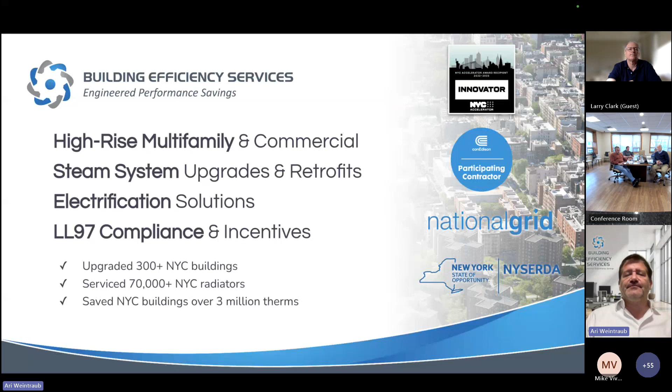Joining us today is Approved Oil. They've been in business now for close to 100 years, over 90 years. We work with the Approved Oil team, really phenomenal guys, very knowledgeable about everything oil, the delivery, the infrastructure, maintenance. We work with Jeff in particular, superstar at Approved Oil, and really great guys to reach out to.

And over at New York City Accelerator, we have Marissa Morris. We've been doing a number of presentations with Marissa, a really phenomenal account manager, an excellent resource for anything Local Law 97. We'll have the contact information at the end.

So let's get into oil heating. I'm going to call up the guys from Approved Oil, and please take it away. Good afternoon, everybody. I'm John Sutherland, head of sales for Approved Oil. I'm joined with Jeff Cohen, who you just gave some nice compliments about. Jeff is the head of the mechanical division, so all things boilers, burners, service, and installation. Jeff will talk today as part of the presentation.

Before I get started, just a quick thing about Approved. As you mentioned, we are probably one of the largest fuel oil distributors and energy providers in the tri-state area. We've been around since 1932. We're going into our 92nd year in business. So tremendous staying power. Again, what we offer: fuel oil, biofuel, diesel, natural gas, electricity.

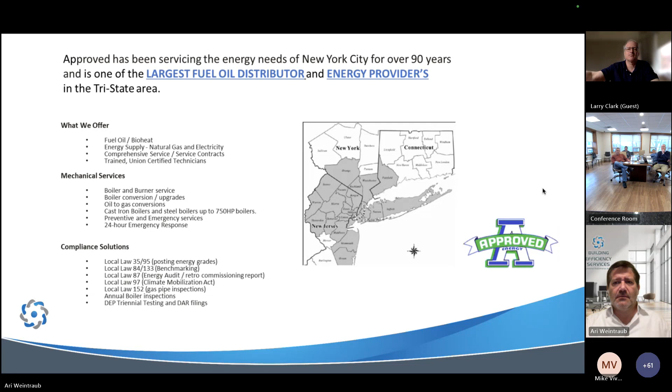So those buildings that are on number 4 oil, it's very important to understand some key dates. It's being banned. You can no longer use 4 oil after July 1st of 2027. Now, even that's 3 years out, but there's a couple of things that are happening. All these buildings that have boilers need to file for a triennial permit, which is a certificate of operation of your boiler and permitting.

If you're a 4 oil building and that triennial permit comes up after June 30th, you will not be issued that permit. That means you have to do something to get off of 4 oil prior to that. If your permit comes due, let's say June 25th, technically you can renew it, and you'd be good through July 1st of 2027. But after July 1st of 2027, you have to be off it.

But even still, if you're a 4 oil building and you start to file for your Local Law 97 related activity, if for some reason you're above the emission guidelines, you're going to have to do something potentially sooner than 2027. So these are the things that you have to be concerned about. Now, June 2024 is for permitting purposes. If you're not in a New York City owned building, you're okay until 2027. If you're a New York City owned building, you cannot burn 4 oil beyond July 1st of 2025.

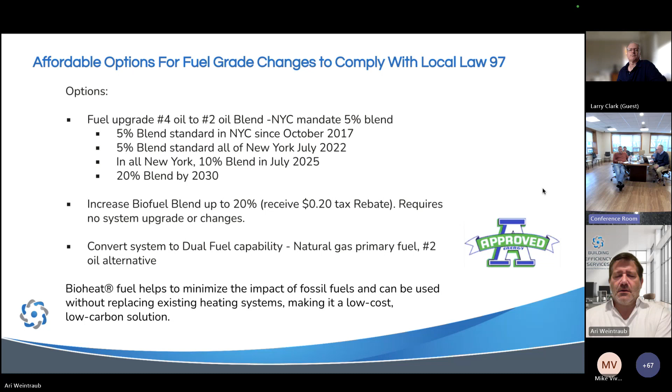The other thing you can do is convert your system to a dual fuel system where natural gas is your primary fuel. And we do hundreds of those a year. So basically you're left with 3 options. You can go from number 4 oil to biofuel, number 2 oil to biofuel, or do a fuel grade change and go to dual fuel and burn natural gas. If you want to change the slide, that would be fine.

So biofuel comes from renewable products. Most of the products you see today are either soy or plant-based products from the Midwest. They're rail car shipped to our terminal in the Bronx, where they're heat blended, put into our 25 million gallons of storage, and sold. As a wholesaler, we sell to other fuel oil dealers, and we sell to our own retail customers as well.

As far as the efficiency of it, it's a little less efficient than your typical fossil fuel products, but the cost is the same and it's cleaner. So it acts as an emulsifier, and what it does is it actually cleans a lot of the debris and sludge that's in the bottom of your tank, and it pushes it through your system. So you end up with a cleaner fuel oil tank structure.

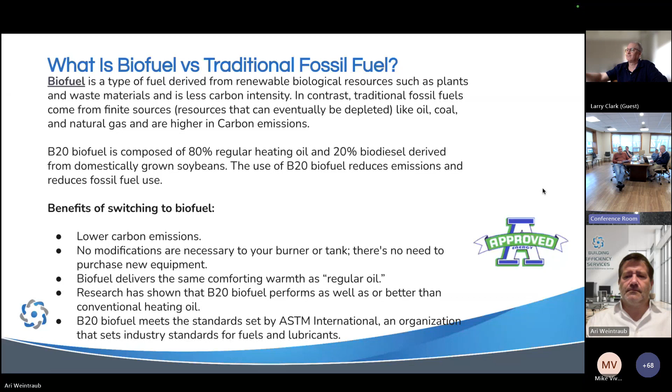So the benefits of switching to biofuel: it has a lower carbon emission. There's really no modifications to your burner or to your oil tank. There's no need to purchase any new equipment in that case. You get the same comfort as regular heating oil, and it performs better in most cases than conventional heating oil because it's got less impurities in the system. And it meets all of the engineering and ASTM standards that are operating within the state and the United States right now. So that's basically the situation there. If you want to change the slide, Ari, I'll go to the next one.

So people often ask, well, I got to change from number 4 oil to number 2 oil. What are the costs involved in that? So basically, the cost could be anywhere from $10,000 to $18,000. And the reason for the difference is what actually has to happen to the tank. And I'll discuss that in a couple minutes on the next slide. There'll be a carbon emission improvement of right now between 14 and up to 18% in terms of your carbon emissions reduction. So that will help your Local Law 97 score.

Also, my concern is as fewer properties begin to burn number 4 oil, we're going to start seeing an increase in the cost, the same way that happened to number 6 oil, which became a boutique blend when a lot of the buildings changed to number 4 and number 2. And as I said earlier, there's no difference in the cost between using a B6 blend and a B20 blend for biofuel. The only difference is the tax rebate. Obviously, with B6, there's a 6-cent per gallon tax credit. With the B20, there's a 20-cent per gallon tax credit that's in place.

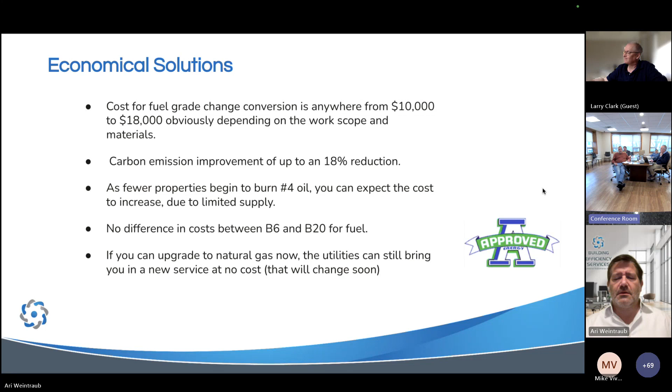And you can still upgrade to natural gas. The utilities can still bring you in a new service at no cost, but rumor has it that that's going to be changing soon. So let's change the slide and we will go through what's needed for a fuel grade change. So the first thing we do is we file with the Department of Buildings for the actual fuel grade change. And we can self-certify the results.

We also need to file an amendment with the Department of Air Resources as well as New York State for the materials that are inside of your oil tank. We inspect the oil tank to make sure you're properly contained. Either the tank is going to be vaulted, which means it's wrapped in concrete, or it's in an oil tank room. And if it's an oil tank room, you're going to have to epoxy paint or line the protective walls of the tank just to make sure that oil doesn't leak out.

They're going to pump out all the product from the tank. They'll squeegee clean out the remaining fuel that's in the bottom of the tank. They'll reseal the manhole cover. When they're done with that, they'll perform a tightness test to make sure the tank is not leaking. They'll install a decal to show your fuel is now burning number 2 oil.

You'll get the written results of the test within 24 hours. You'll know if you passed or not. And we'll perform the necessary burner work, which is nothing more than plating off the preheater, probably doing some adjustments to the burner, cleaning the nozzle, and then we sign off the project.

But if anyone's interested in getting this done, it's going to be a very busy summer for that. We have a lot of people already signed up to do fuel grade changes to number 2 and eventually to go to gas. You can change the slide, Ari.

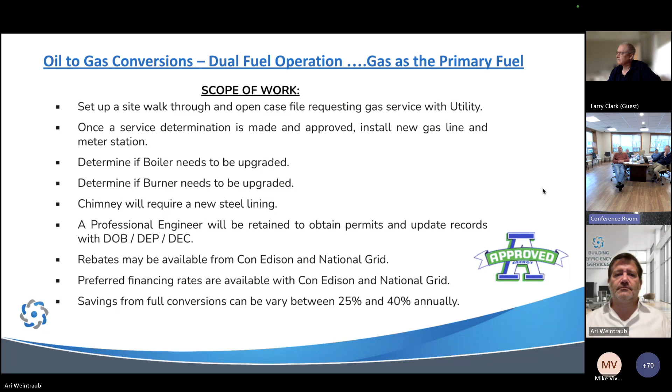So basically you're paying for this conversion through savings. And the savings annually, if you do the full conversion, could be anywhere from 25 to 40%. And that's it. So now, John, I'll turn it back to you as far as biodiesel and how it can help and where the emissions fall out on these.

Sure. Just to recap what Jeff said, certainly #6 oil is going away and customers have to do something about that, right? They can easily do a fuel grade change by going to 2 oil and then purchase a blend of either a B10 or a B20 at roughly the same price that they're buying today, but you would get that tax rebate on the back end. So you can get up to a 20-cent tax rebate if you go to a B20, and it'll certainly help that building meet whatever Local Law 97 mandates or guidelines are posted for the year 2030.

Or you can go the more expensive route right now, which would be a dual fuel opportunity where gas is the primary fuel and oil is the backup. But I just want to say one thing: you can do that, but if you're on 2 oil today and you go to a B20 blend, that B20 blend is 14.6% less carbon intensity than natural gas.

All right. So you might not have to do a complete capital project, which could cost you $350,000, $400,000 to put in new boilers, burners, and everything, bring the gas main in and so forth. You might be able to just get away with going to a B20 blend, less costly in terms of the capital cost, right? And just as efficient as anything else, but really no equipment upgrade. So I think that is certainly what we want to stress right now.

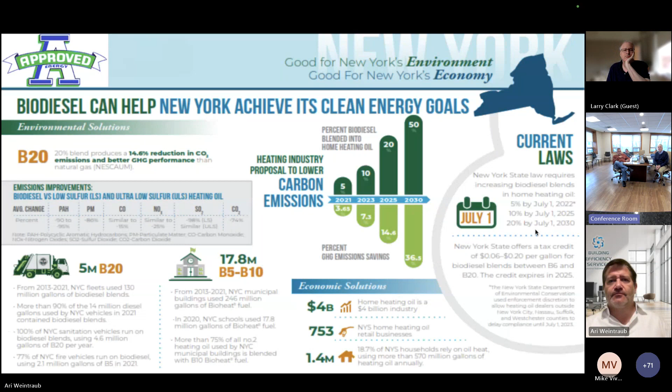Thank you very much, guys. Really great presentation. And I would also comment on something Jeff said, that it's going to be a very busy summer. The deadlines for Local Law 97 have kind of snuck up on us, and now we're in it in 2024. The work should be done by the end of the year and filing in 2025. So we're feeling that as well as contractors helping buildings with their efficiency. Better to get on it sooner than later. Reach out to Jeff and John. They'll be able to help you decide on your next steps, but better not to wait on it.

So let's go on to Local Law 97. I'm going to call on Morissa, please, from Accelerator. Really phenomenal resource for Local Law 97. Go ahead, Morissa. Yeah, thanks, Ari. Hi, everyone. My name is Morissa Morris. I'm an account manager with the New York City Accelerator program.

Just a little bit of background on our program. We're a completely free advisory service through the Mayor's Office of Climate and Environmental Justice. We work with thousands of buildings across the 5 boroughs to build a cleaner future by lowering pollution and reducing carbon emissions. Any building over 5,000 square feet can work with us, new or existing. Smaller buildings we can refer to our partner organizations and other programs available to you. How does it work? You reach out to us, get connected with a dedicated account manager like myself, and receive objective advice customized to your needs.

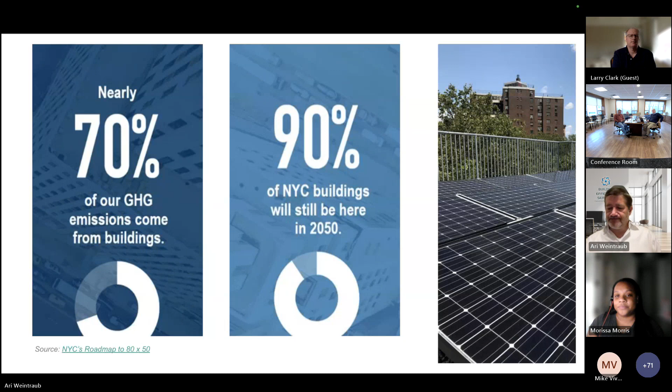So first, the Climate Mobilization Act. This was passed in 2019. It is the largest climate solution put forth by any city in the world, and it consists of many different local laws. It's a legislative package to limit emissions on buildings over 25,000 square feet. So this includes Local Law 92 and 94. These set the green roof and solar PV mandates.

Local Law 33 and 95 establish energy efficiency grades in our city. Local Law 96 establishes PACE clean energy financing, and the backbone of the Climate Mobilization Act, Local Law 97, which we'll talk about in way more depth today, sets carbon emissions intensity limits for buildings over 25,000 square feet.

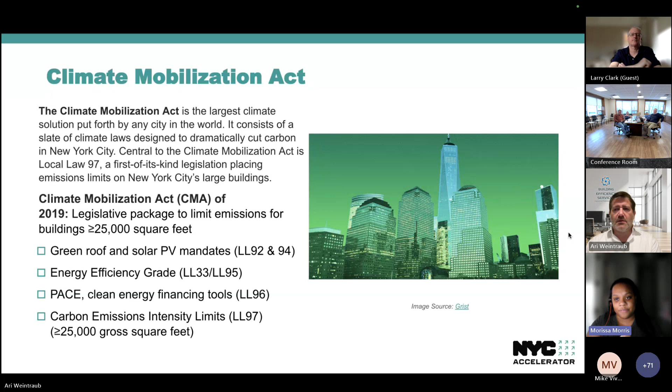So as a quick overview, as I said, Local Law 97 sets carbon emission limits for buildings over 25,000 square feet. It's broken down into two main articles. There's Article 320, which outlines emission limits for different occupancy types, starting this year in 2024, with increasingly stringent carbon caps every 5 years through 2050. Specifically, affordable housing under Article 320 has some different requirements, and I'll talk about that in a later slide.

There's also Article 321. This establishes an alternative pathway for certain types of affordable housing, providing the choice of the prescriptive pathway or meeting the 2030 limits by 2024, so by the end of this year.

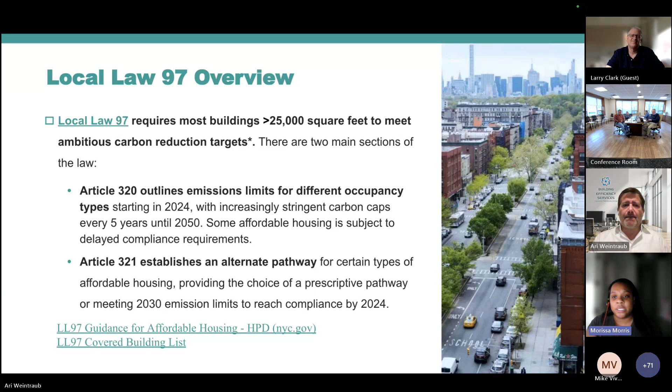Two really important links that I want to highlight, and when you receive the slideshow afterwards, you can definitely take a look. Local Law 97 guidance for affordable housing on HPD's website is a great place to start if you have no idea where to begin. And the Local Law 97 covered building list. If you're not sure if your building is subject to Local Law 97, I highly suggest this being the first place you take a look. See if your building is on this list, and if it is, then feel free to reach out to the Accelerator program, and we'll be able to give you the next steps for your building to comply with Local Law 97.

So as a quick overview of affordable housing under this law and how the different articles could apply to your building, Article 320 and 321 are broken down even further for affordable housing. Some important things to note, and I'll go through this chart in a second, but in 2022, DOB released a first rule package that provided some more clarity to owners. And then in 2023, DOB released a second package of rules, which includes Article 321 penalties and penalty mitigation opportunities for both articles, Article 320 and 321.

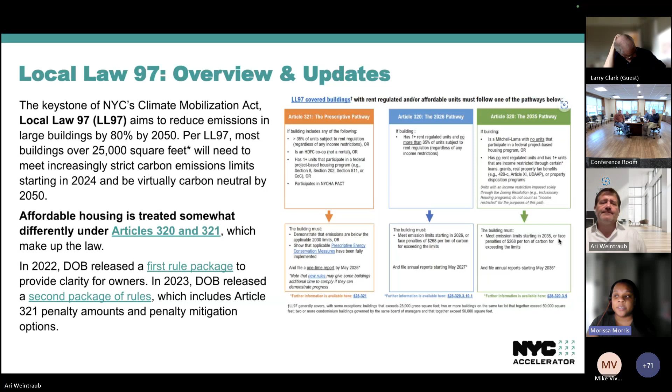So if you are interested in more information on those penalties, penalty mitigation opportunities, and how your building might be able to take advantage of those mitigation opportunities, definitely reach out and we'll be able to give you some more guidance.

So this is a breakdown of the chart on the first slide. What I want to highlight here is which buildings apply to Article 321 versus Article 320. So Article 321, the prescriptive pathway, applies to buildings with more than 35% rent regulated units, HDFC co-ops, buildings with one or more units with federal project-based funding, so that's like Section 8, 202, 811, and NYCHA PACT and RAD buildings.

Under Article 320, but subject to delayed compliance, buildings with at least one rent regulated unit, but up to 35%, would comply under Article 320, but they have a delayed compliance until 2026, so that would be their first year of compliance.

And then for Mitchell-Lama rentals and co-ops with no federal project-based funding, and for buildings that have no rent regulated units, but at least one income restricted unit, they would comply under Article 320, but they have a delayed compliance until 2035. So if you think any of your buildings fall in those two pathways, again, I can't reiterate it enough. Still reach out, even though you have a delayed compliance, you definitely need to start planning now.

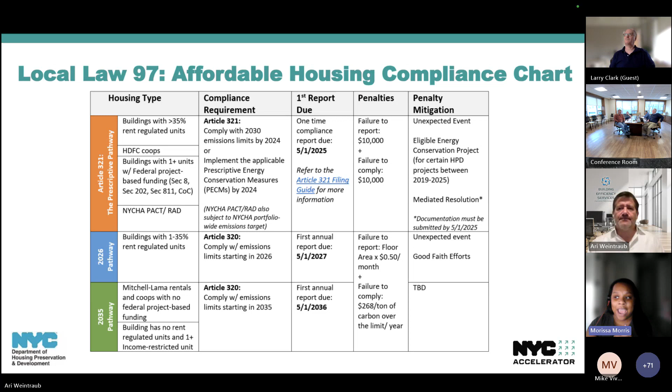So this is Article 321 in a little bit more detail, and we'll go through this row really quickly. So as I mentioned, the different housing types that fall under this are those different types of affordable housing. The compliance requirement for Article 321: you either need to comply with 2030 limits by the end of 2024, or implement all the applicable prescriptive energy conservation measures by the end of this year.

For affordable housing, this is the important distinction. This is a one-time compliance report that needs to be filed May of next year. So it is a one-time compliance. You don't have to meet those subsequent limits up to 2050. And the penalties set for affordable housing are failure to report is $10,000 and failure to comply is $10,000.

The penalty mitigation opportunities under this article are if there's an unexpected event or if you have an eligible energy conservation project, and that's for certain HPD projects. And there's a mediated resolution specifically set for Article 321. And if you need some more information, of course, I can provide that for you as well.

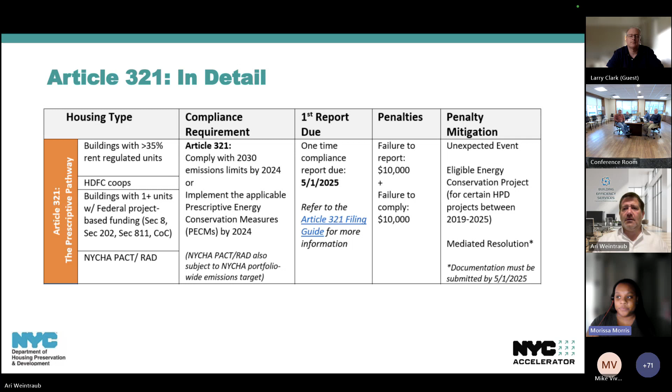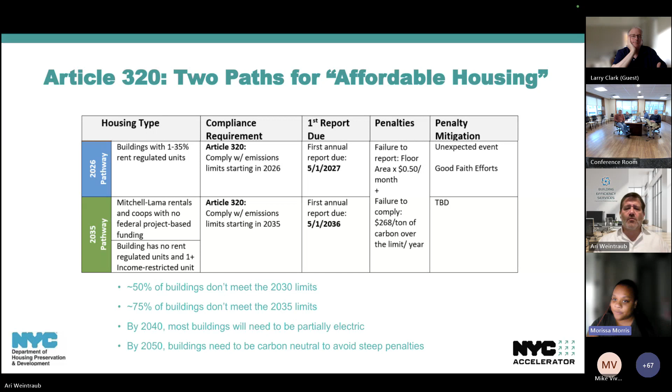Some things I want to highlight for these two groups of buildings: 50% of buildings subject to Local Law 97 don't already meet the 2030 limits, and 75% of buildings don't meet the 2035 limits. So, although you have this delayed compliance, it's super important to make sure that you already have a plan in place to figure out how you're going to get your greenhouse gas emissions lowered. And by 2040, we expect most buildings will probably need to be electric, or partially electric. And by 2050, buildings need to be carbon neutral to avoid steep penalties. So, as I said, we're in 2024, but it's super important to start planning.

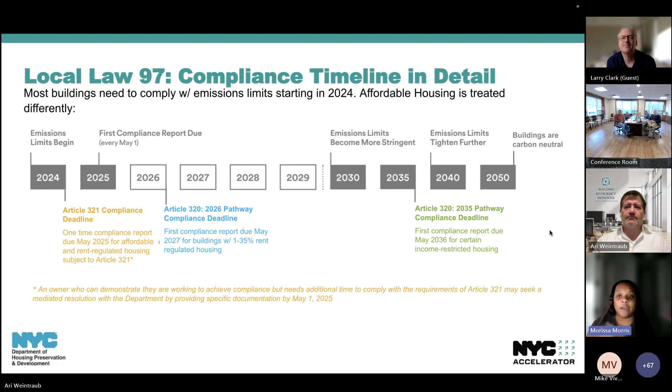This is that entire timeline that I just mentioned, but at a glance. Super important dates to take a look at: 2024, that's when emission limits begin and the Article 321 compliance deadline. The 2026 pathway, of course, is coming up, and that's when you would start your yearly reports. And then that 2035 pathway, your reports will start in 2036. So it's super important to take a look at your greenhouse gas emissions and see how you should plan to start lowering them.

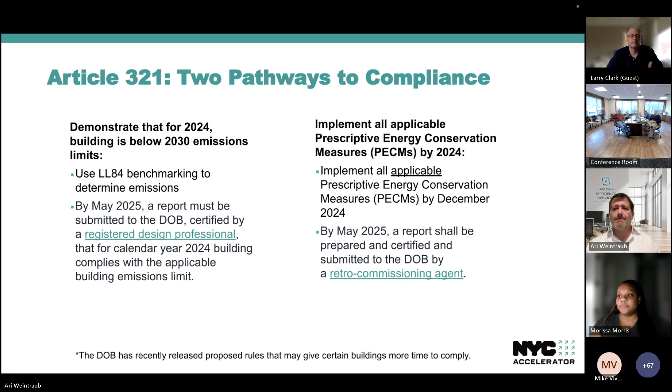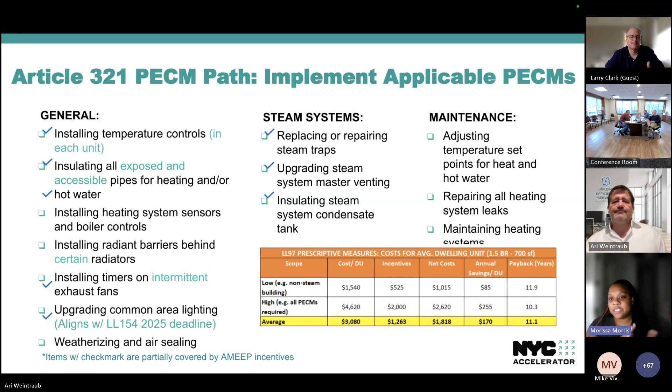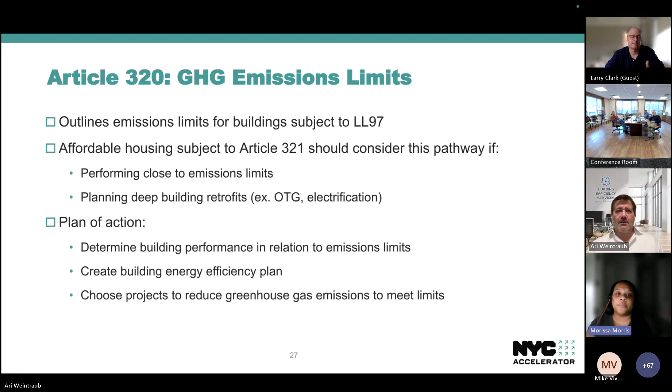So the plan of action here is determining your building performance in relation to emission limits, creating a building energy efficiency plan, and then choosing projects to reduce your greenhouse gas emissions to meet those limits. And what has already been highlighted, but it's super important, is the number 4 oil phase out that is beginning this year. So if your building is currently on number 4 oil, we definitely suggest reaching out to our program and getting in touch with contractors like BES, like Approved Oil, to come up with a plan that works best for your building.

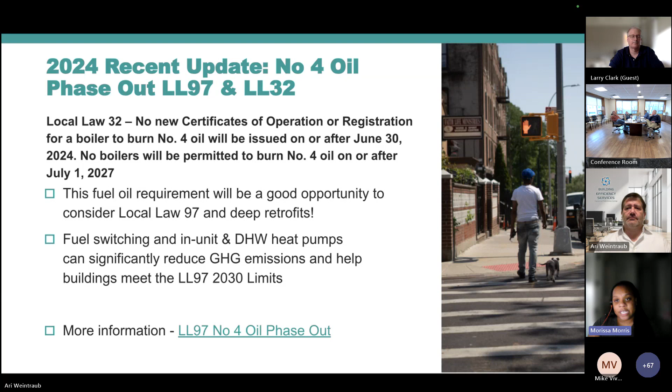And just to highlight how our program helps, you can get in touch with us. We would clarify the Local Law 97 requirements for your building, identify those greenhouse gas emissions and compare them to the limits, and then determine which pathway is best for you. If you have an affordable housing building that falls under Article 321, we can suggest either meeting the greenhouse gas emission limits or implementing the prescriptive measures. Then also help identify applicable financing and incentive programs, assemble a team of service providers, and provide project management support through project completion. So however much help you'll need, we're here to be an asset to you and your project.

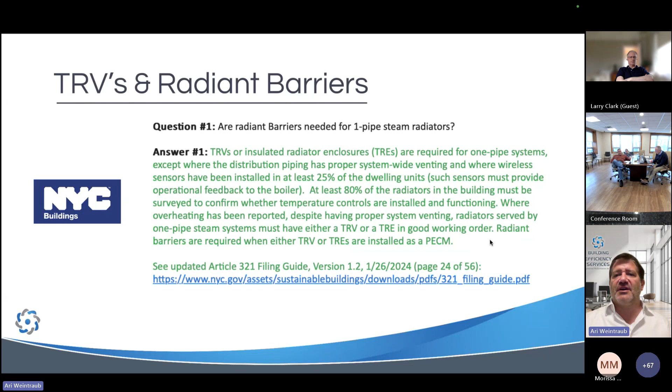The language we actually got back from the DOB was, once you are going into the radiator, they want to usually do radiant barriers, but if you're not going into the radiator, it's not going to be a requirement. So for hydronic radiators, usually you're not going to be responsible to put in radiant barriers there as well.

Another big question we had, and we get a lot from buildings, is if a building is really considering what their options are, and they know that there is a fine of $10,000 for not filing and another $10,000 for not fulfilling the Article 321 pathway, maybe their low cost option is just accepting the $20,000 penalty and being done with it. And we asked the DOB very clearly about this, and what they came back and said is that this is not necessarily a one-time fine. They reserve the right and discretion to issue recurring penalties for non-compliance with Article 321 and Local Law 97. So every building has to decide what they need to do for themselves.

Of course, every situation is different. We speak to all kinds of management and owners directly, but please keep that in mind as you're making those kinds of considerations. Some additional inquiries: temperature controls for hydronic systems. That's what we just mentioned. You do not need to add new controls. If they're there already, you need to make sure they're functioning.

So radiant barriers do not need to be installed. These, by the way, came not from the DOB, but from New York City Accelerator. Do you need to take off radiator covers to install barriers if it's necessary to install barriers? Answer is yes, right? Once you're going in, you're going in. And what's the real number for 100% in-unit?

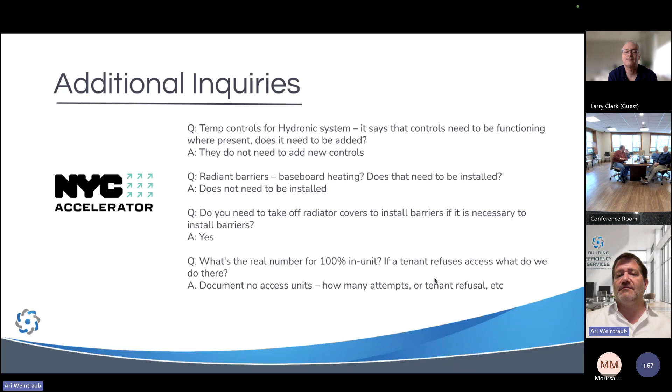Part of the guidelines was to make sure that every single unit has these temperature controls. We're in the business of helping buildings actually do the in-unit and common area work, and sometimes 100% is just not possible. They're putting out further guidance on it, but I think the number now is maybe closer to 80%, but still you've got to document which units you really did not have access to, how many attempts you made, et cetera.

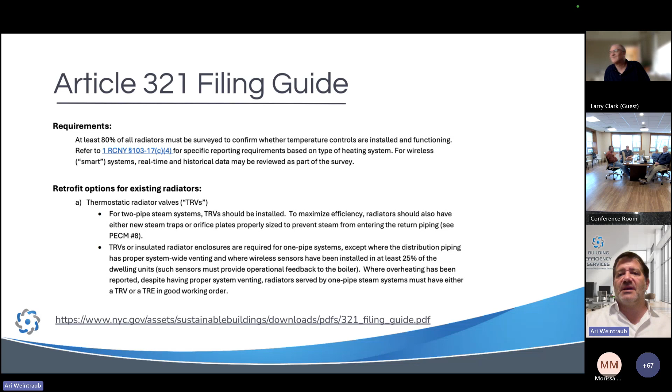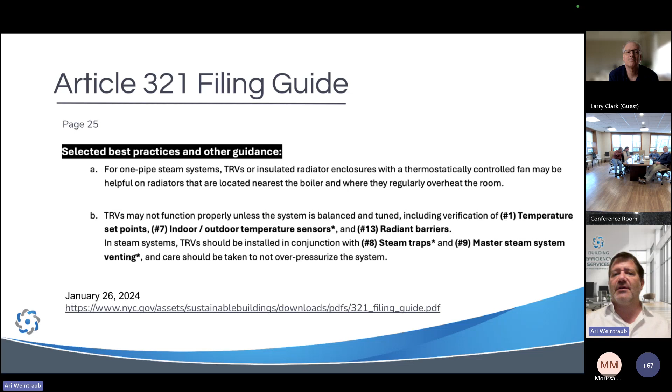When the filing guide came out in January, I think Morissa had a link to it earlier. It's down there below as well. Those answers we got from DOB were basically repeated verbatim in the filing guide. Just want to point out, even though TRVs are not required for one-pipe steam systems, they're still recommended for radiators that are close to the boiler where the pressure is higher, and to help regulate the system. So maybe the first floor, second floor, or the areas closest to the boiler.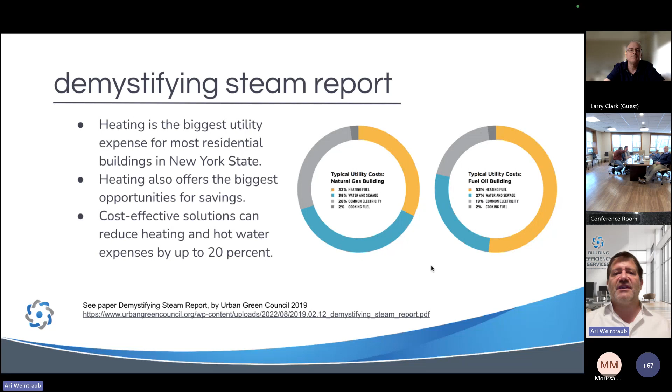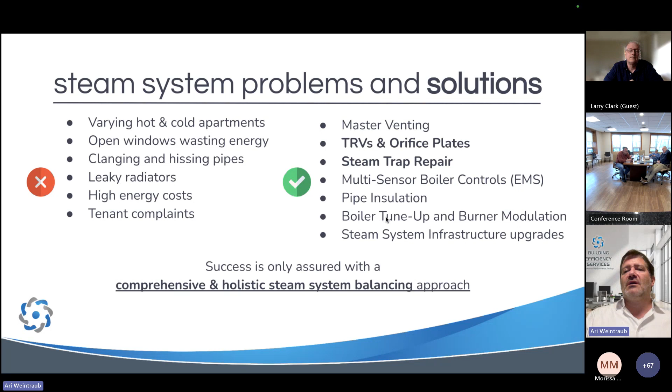Some case studies. We don't have a lot of time, so I'm going to pick up the speed a little bit. Because so much of New York City's energy consumption is from its buildings, it also presents the greatest opportunity to save. Problems that we see very often in steam systems: varying hot and cold, clanging pipes, high energy costs and tenant complaints. We offer a complete, comprehensive, and holistic approach to steam system balancing, and the full 13 measures that Morissa had up earlier to comply with Local Law 97 if you're an Article 321 building, and a lot of these measures will show up in that list as well.

One thing I would point out briefly is orifice plates. BES, Building Efficiency Services, we've done probably more orifice plate projects than anyone in New York City. We have a lot of experience, very proficient in our engineering and our calculations. Orifice plates are basically an engineered disc that goes onto the inlet side of the radiator. It regulates the amount of steam coming into the radiator, therefore eliminating the need for steam traps, which normally need to be maintained and replaced every 3 to 5 years.

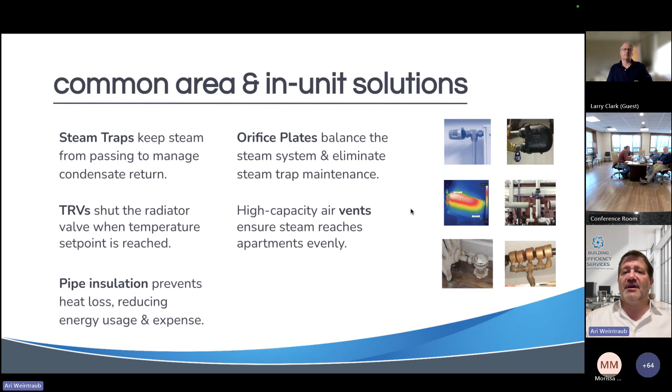So that's a big operational cost and expense that is eliminated, and really goes a long way for steam system balancing. Orifice plates are for 2-pipe steam systems, by the way, not 1-pipe, where a steam trap would normally be required.

So I put this one up here, a recent project we did, Queens oil-fueled affordable. This is a little on the smaller side of buildings we normally do, maybe about mid-size, 53 units, 1-pipe steam pre-war building. Really nice. We dealt directly with the owner, or the owner's daughter, really nice woman. Jackson Heights. They realized a 15% reduction in their operating expenses and saved over 3,100 gallons of oil.

So this is a great way to stack the efficiency together with approved oil, right? They have excellent solutions to phase out number 4 and increase your efficiency. And then making sure that your distribution system in the building is operating efficiently is a great way to reduce your carbon emissions and really stack your efficiency.

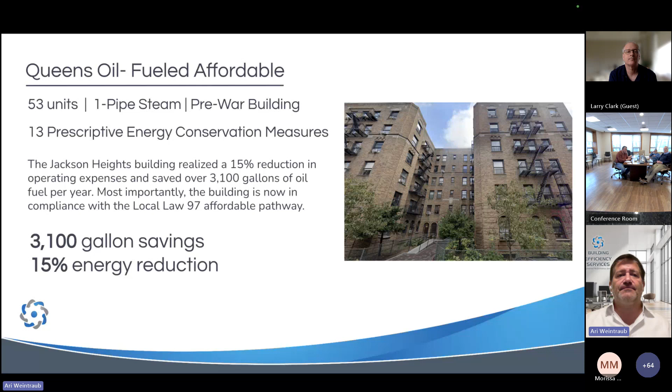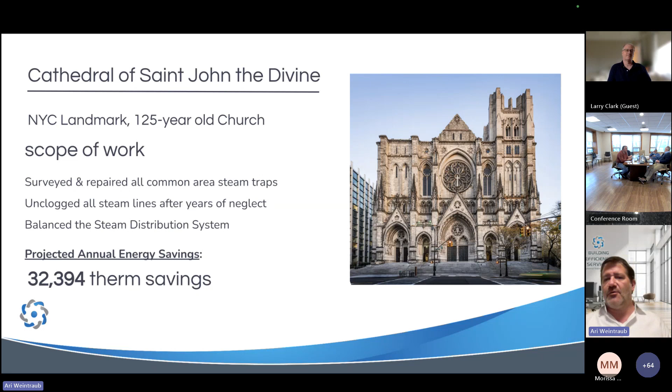Another project we recently did, we were just proud to be awarded this project. It's a landmark church in New York City. We surveyed and repaired all common area steam traps. An interesting thing to note here is that houses of worship are considered Article 321. So they would also be eligible for the 13 measures to comply with Local Law 97.